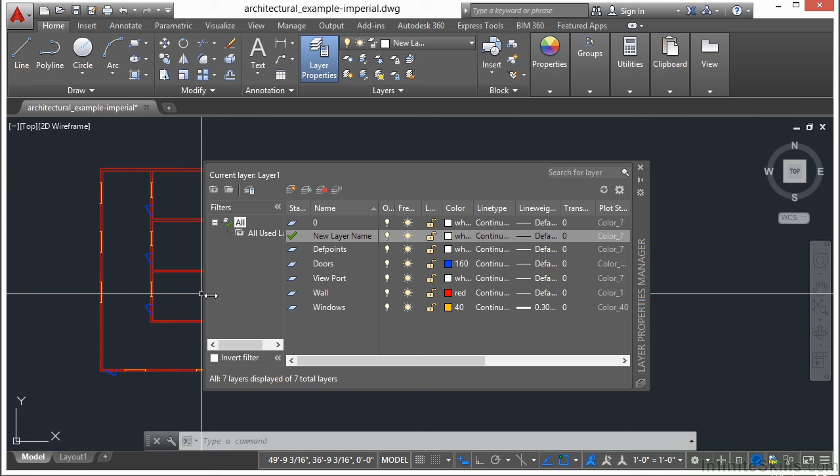Now, a lot of these columns of information can be quite long or wide. If I move my mouse up here and I get this little double arrow, I can drag it over left or right, and that will help me get a better look at what's going on. If I double click when I'm right up there, it'll expand the width until it matches the widest part that we have. Remember, your layer manager is a palette, so you can stretch out the sides if you need to. This will give you a little bit more room.

And in fact, you can even turn off some of these columns if you don't want to use them. To get to some of the other settings for these different columns, make sure you don't have a command active, and then right click over the top of one of these column headings. Everything you see checked here is turned on. Now I can check this to turn them off, and now it saves some room. If you want them back on, just check them again.

Every layer that you have can have a description, and I think it's a good idea to fill that out. In this case, we see a layer called Viewport, and it says it's for viewports set to no plot. That's another feature that we have right here, the plot feature. Right now, this one has a little red circle with a slash through it. That means anything drawn on that layer, even if it's turned on or thawed and visible, it won't print to your paper.

That's a great thing to do with the viewport layer. It's also a great feature to add to construction lines, anything you use to help you draw with that you need in your file, but you don't want to show it in your drawing. That's what that no plot setting will do.

It's very useful. Now you can change layer settings for multiple layers at a time. So just select the different layers you want, pick one, and then hold down the Shift key, and it will pick everything in between that. Click somewhere else to unselect all of those, or you can just press and hold the Control key and select the layers that you want to change.

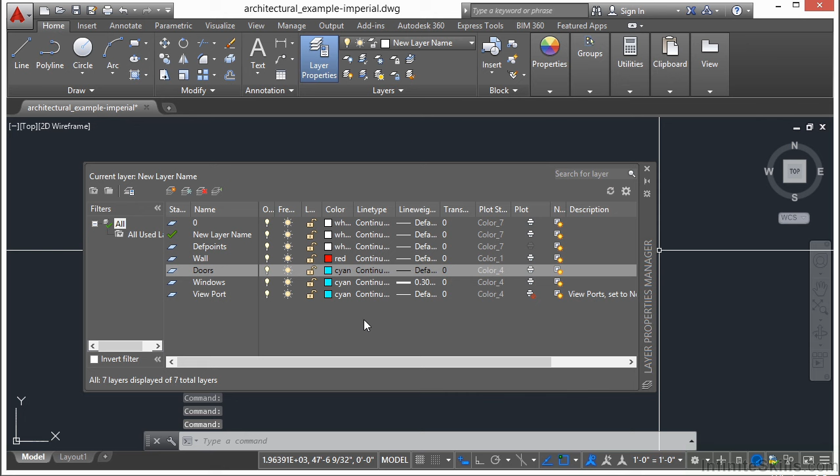Now you can turn them all off, turn them all back on. You can freeze them, change their colors, whatever it is that you would like to do. This is handy because it allows you to change your file in a lot of different ways very quickly.

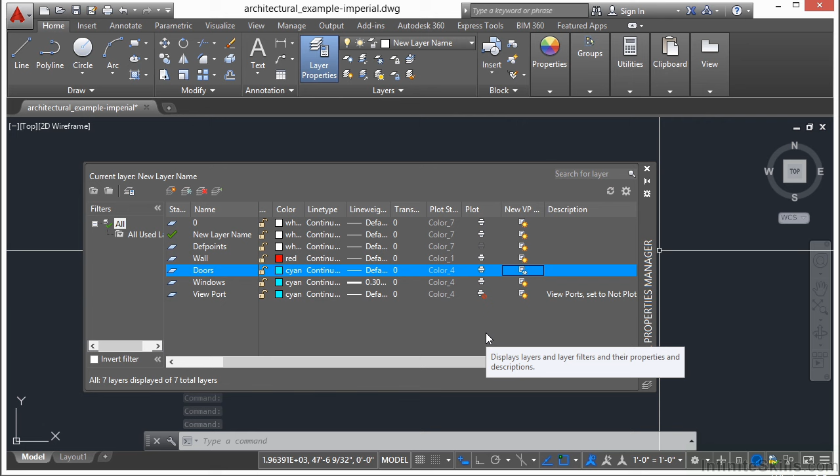You can also create layers that are automatically frozen the first time they appear in a new drawing or layout. That's what this option is right here. You might want to do this if you're working on an existing drawing and you're adding a new feature to it that needs a new layer. Turn that on, and what will happen now is whenever a new layout is made, that layer will automatically be turned off. So if I close this, I go to a layout.

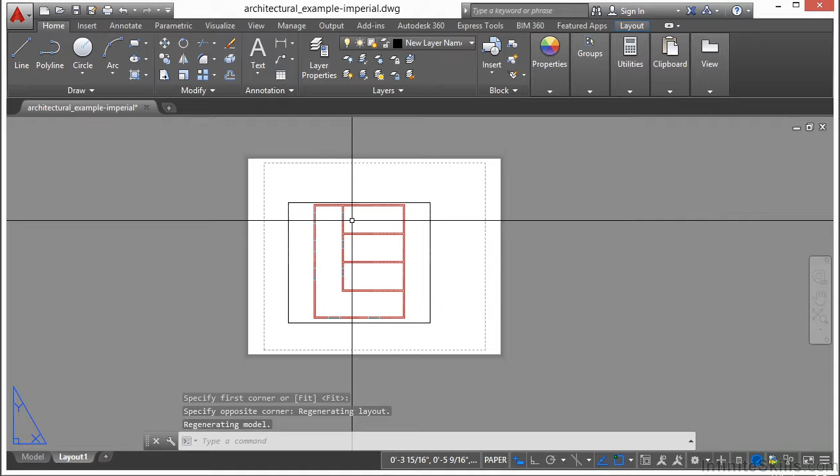Let me erase this one. If I go to create a new viewport, I just want to make one single viewport. When I do, all of my doors are turned off. As you can see, they're not in there.

I can go into this viewport, open up my layer manager, and I'll get a few more columns for viewport settings. This tells me right here that this is frozen in the viewport. If I select it, my doors will come back on, and there they are. So you can isolate objects, hide objects by viewport through those viewport-specific settings.

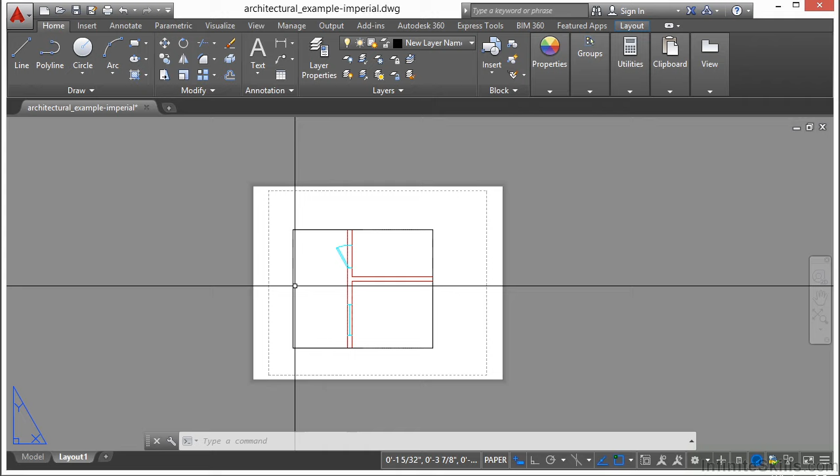The nice thing about being able to do that is that I can have one set of line work, one model, but I may need to display it differently on multiple drawings. This allows me to do that without having to draw new layers for specific reasons. I can use the same ones that have the information on it already that I need. I can just choose to not display it by freezing them in that specific viewport. And on the same note, you can also change things like color and line type by viewport only. That way you can make a construction line, a solid line, show up in one drawing, but then make that a hidden line in another drawing without having to change your drawing objects.